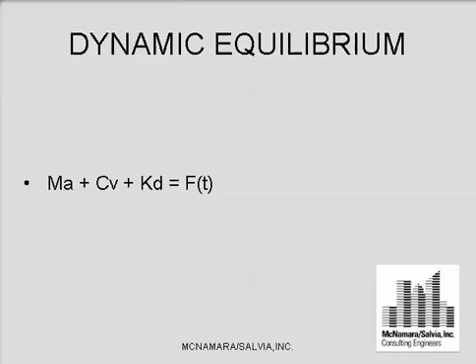So one of my problems in discussing damping is this mixed nomenclature that exists. As I said, standard structural design is stiffness and strength. Every day of the week, as structural engineers, that's what you deal with. It's static forces, usually, and it's displacement related, something you can all relate to, beam deflects, etc.

Conceptually, damping, we really don't know much about it. We don't have a feel for what C is, the term in the equation that's supposedly equivalent to the mass or the K terms. And what it does is it just groups whatever response to K that you find in your actual structure, which is based on dissipating energy.

It groups all of that, whatever it is, joint slippage, material nonlinearity, etc., into one term, damping, and it makes it this mathematically convenient term of a viscous damper, or viscous damping for the mathematics, really. As I said, it doesn't exist in nature.

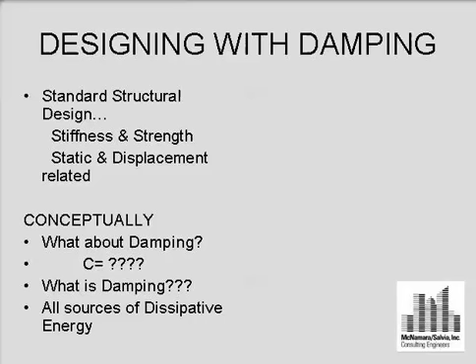We assume values of 0.5 to 2% of inherent damping. This is damping that you find in actual structures. For wind, seismic, as I said, it's a common assumption to have 5% in all of the equations. That's what the response spectrums are reduced to, and again, for no real good reason other than historical.

The damping values that you assume are system dependent. If you have a steel axial force tower, a guyed tower, for example, no concrete, no nothing else on it, just steel, it's very light, might even be 1/4% of critical. You have a moment frame. Everybody says moment frames are great, they're 2%.

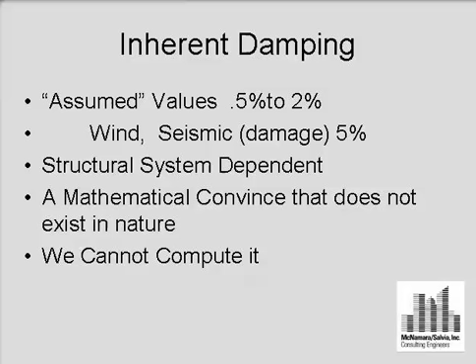We can't compute it. So, since it is such a powerful response-reducing mechanism, the way to approach it, I think, is to design systems that, the same way you design your structural parts, your geometry, your sizes, you design a system to provide you with a specific amount of damping. And that you get the reliability of knowing you will reduce the response based on that calculated and designed amount of damping.

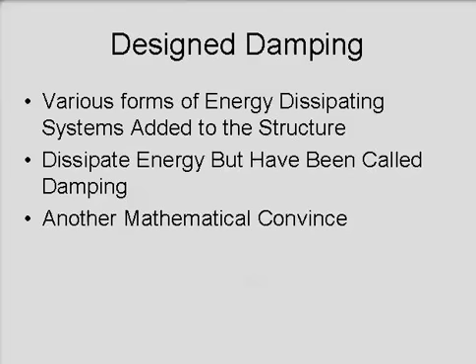Equivalent damping systems come in many different forms, and this is another problem with lumping it into so-called equivalent damping or damping systems. They're dissipative systems, and each one dissipates energy in a different way. Friction dampers obviously do it through friction, but they're displacement-based. They're displacement-related, so when they're dissipating energy, the structure is deforming the same as it is when resisting it through the stiffness matrix terms.

Viscoelastic dampers, which are material-dependent, are also displacement-related. Yielding dampers, where you actually yield parts of materials—several in the audience, I'm sure, have designed some rather esoteric yielding systems—again dissipate energy, and it's displacement dependent.

The viscous dampers are a different breed—shock absorbers. You all have them in your cars. I used to have a car that had very poor shocks, and when I drove it, you really knew you didn't have shocks. Today I don't think there are too many examples of that, but that was a few years back.

But they are velocity dependent, which is really different than what you're used to designing with, because viscous dampers and velocity dependent dampers have their maximum effect when the velocity is maximum. In most tall structures, which is where we apply a lot of these, the velocity is maximum when the displacements are zero. That has a significant effect on the concept of how to design with these things, because when their maximum effect on the structure occurs—the maximum value of the forces in the dampers—the displacements are zero.

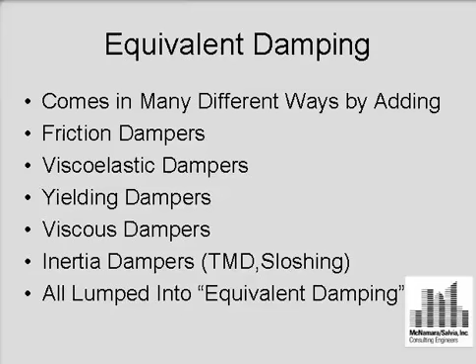Thinking about that, one of the ways I like to think about the dissipating systems—and I have to pause to stop calling them damping systems, because that's the way it has grown in the literature and that's the way people talk about them—but if you look at a building, a simple frame, fitted with dampers as a viscous damping system, shock absorbers for example, you have your static resistance, which is based on displacement. You have the dynamic resistance, which is based on velocity. So you have these two different resistances that you create.

One is created by stiffness, resisting the loads with your structural stiffness. The other is by the motion that happens because of the action on the building, which creates corrective forces, if you will. In viscous dampers, they are velocity dependent. In the tuned mass damper, it's displacement dependent, and it's simply a corrective force at the top of the building where the mass is. But it's a corrective force—it's not a mysterious damping hidden in the equations.

If you start to think about it as corrective forces, then you can start to think about how you arrange those corrective forces to provide the best system to resist whatever you're trying to resist or reduce. That takes away the mystique of the big C value in the equation, because I still don't know what to guess at the C is when I'm doing these numbers. I always back figure from forces I need.

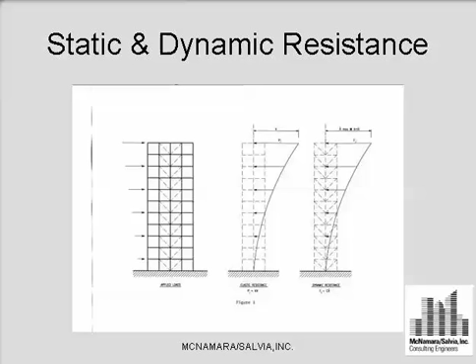But these systems are different. These are definitely designed. So basically, you have to think about them as how they work. Think about what they're doing to your structural system, not as this equivalent damping. Although I might have to return to that in a bit, because the industry has accepted equivalent damping. And if you're going to do any work in the wind tunnel, they want to know what the damping of your building is, because all the numbers they give you are based on your damping. So you're either going to guess, or if you're designing a system, you're going to tell them what it is, and then you'll get your numbers.

Now, as an aside on that, the wind tunnels are doing tremendous business these days in heavy wind areas, because if you have to design these tall buildings for the wind forces that are in the codes, forget it. It's not going to happen.

In South Florida, for example, code forces at the 146-mile-an-hour winds on ocean exposure conditions, exposure C or D, by the code, are horrendous. The wind tunnels are giving us back reductions of 30%, 40% of those numbers. That's significant, but there's a crux to that reduction. What's your damping? Well, a lot of engineers now are saying, oh, it's 3%. Where are you getting 3%? But they're saying that, and it's absolutely wrong.

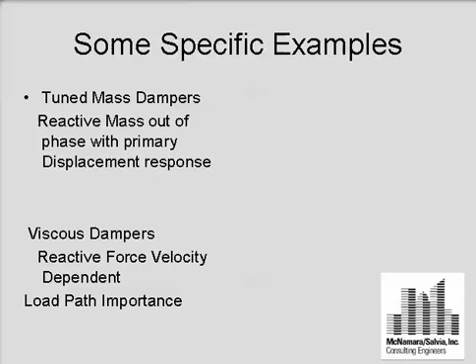But these are the thoughts I have on the whole area of damping design, or what is equivalent damping, and I try to categorize it and cast it into the dissipative systems thoughts and concepts of forces that you create. And that's really what I can leave you with in terms of designing concepts, because that's how they work and that's how you should think of them. And it's important, and the load path is the other important aspect.

So I'll give you a couple examples here of some of the damping designs that we've done. Some of these are a little different from what I just talked about, but I think they're interesting. This one I like especially because it was one of our high-end hospitals with the most sensitive kind of equipment that you can imagine. And if you ask the equipment manufacturers what you have to design for the floor, you know you can't make your floor that stiff. And if you do, your owner can't afford to make your floor that stiff.

So you have to look at different approaches, but this is another area that gets tangled in with what indeed is the damping and what indeed is the measured damping of the floor. This was a little area in Mass General Hospital in Boston. There was an MRI installation. They were having worries about footfall vibrations like most hospitals do worry about. We designed it for nothing special, the usual hospital live loads. We don't design any of our office or laboratory floors for these very stringent vibration criteria because you can't really meet them with economical designs, and we find that you don't need them.

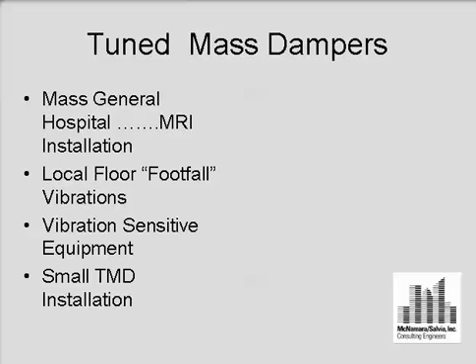We've done literally millions of square feet of this stuff, and if you have a problem, you might solve it this way. This whole area is a cantilever, that gray area. I think there's a column back here and a column over here somewhere. And this area was the corridor, and the MRI was down in here. And they were having some vibration problems.

So we suggested putting in, it couldn't get too much worse. This is where the ambulances come in. So you have vibrations coming up also, not just coming from the footfall. But I like the solution because the solution just is very high-tech and then very low-tech.

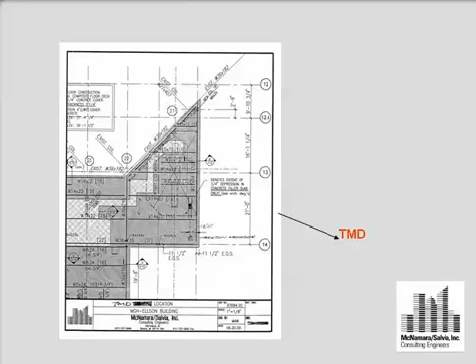The tuned mass damper was placed right near where the corridor turned and where they actually measured the floor, where we were seeing the response being maximum when footfall was applied at that location. So we put a tuned mass damper in, which is not always the best solution for footfall, but the damper was made up between the two beams.

That's a section there. I found a piece of metal deck on the job site, and that's the spring in the damper. It happened to be the right section modulus, moment of inertia. Actually, they put it in upside down first, and then we realized that they had it in upside down. So we had this bottom piece, which is a piece of metal deck, and that's your spring in your tuned mass damper, if you will.

The mass right here was plumber's lead, and we added plumber's lead until we got the right mass we wanted on the mass damper. And then we taped it up with duct tape.

And then we had a Senatech come in and design the viscoelastic damper to give the tuned mass damper its secondary damping, if you will. If you look into the tuned mass damper design, there's the system design, then there's the tuned mass damper secondary damping to keep it out of phase with the main building or main system. That second part was the very esoteric, high-tech design by Senatech, to come up with a wire that was in some kind of goo that gave us the damping in the second system.

It worked like a charm. And here it was, pieces of nothing that just were the right properties, killed the damping, killed the footfall vibration with that damper system.

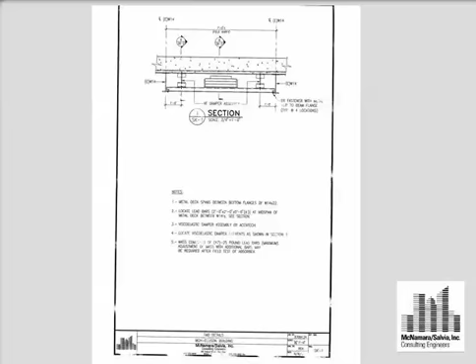But we did measure the response after we put it in, and tuned mass dampers, if you design them properly, can reduce your response by about 30 to 40%, the dynamic part. So that's it, and that's what it was. It was, I forget how many pieces of lead, and then duct tape to hold it all together in a plywood box. So that was one high-tech damping solution.

And then they refused to pay us for it, so that was a different issue.

But this is one I did last year. Another type of damping or dissipating energy problem where there was a design being done in San Diego.

A church, called a rock church in San Diego. I don't know too much about it other than I was brought in as a consultant for the design of the tuned mass damper. Before it was built, the congregation and building committee were concerned about the possibility of the auditorium vibrating, because basically it's a rock church.

They really get heavy music and loud and bouncing around, and it was all these cantilevered balconies that the congregation would be on. So they asked us to damp it, or they said they don't want to have annoying vibrations.

Well, what is the input? I don't know. What's acceptable when you're bouncing on the balcony singing rock songs? I don't know, that's not in any code that I know of. So I created a forcing function that I thought might be what a rock church would do, and we knew we had to put in a tuned mass damper.

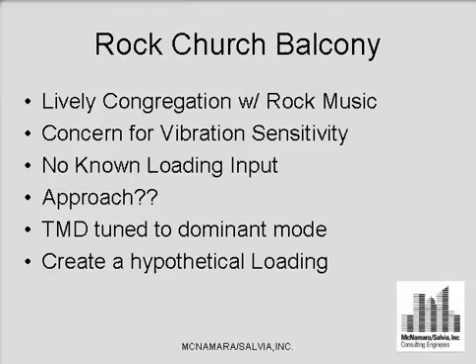So how much would it bounce? I have no idea. But I put a person on every one of those nodes, and then I made them bounce up and down, sort of like if it was a rock song. And then I said, maybe we'll accept half of that as a number. And it seems to work.

Taylor Devices did the whole design for the two tuned mass dampers. It looks now, though, I just found out this morning, that we thought the two would be fine because most of the action would be in the center. It seems like the side balconies, where we didn't put the dampers—because we did have a design for 4 of them, but of course I didn't want to go for the full expenditure at once.

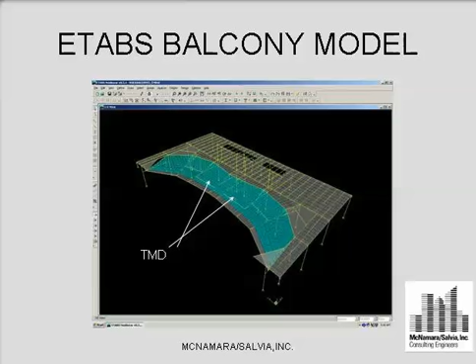It looks like the side balconies is where all the real action is, and that's bouncing a little bit too much, so we may have to put 2 more in there. But it seems to be acceptable, whatever that is - the congregation says it's okay. So that's another off-the-side application of a tuned mass damper.

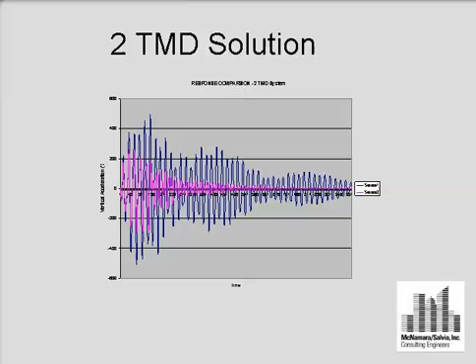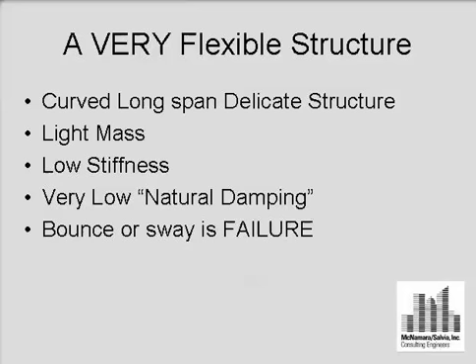This is another tune mass damper type application - a very flexible structure, light mass, low stiffness, very low natural damping, and any bounce here is failure, because this is one of these pedestrian bridges, and if they bounce, people won't go on them. You have to close them, the lawyers take over, and that's considered failure. But they're very light, with virtually no cladding, and they seem to all have similar spans - 60, 80, 90, 100 feet is what you end up doing.

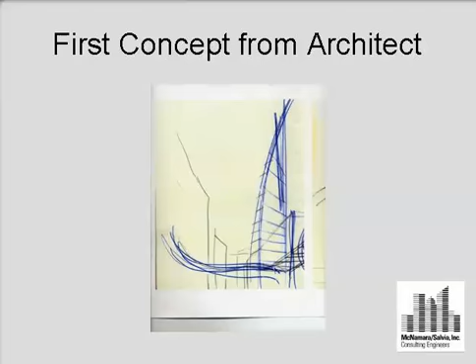They all seem to end up - well, this is the sketch we got. This is sort of what Howard Elkus wanted. He said, see what you can do. I'm sure you've seen other cases where you don't have too much information to work with, so I sent it back and said, I need to at least know something, Howard, help me. So he sent me back with that - he gave me the height. And then we just went ahead and created a model

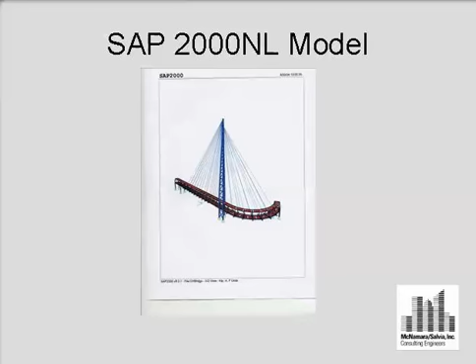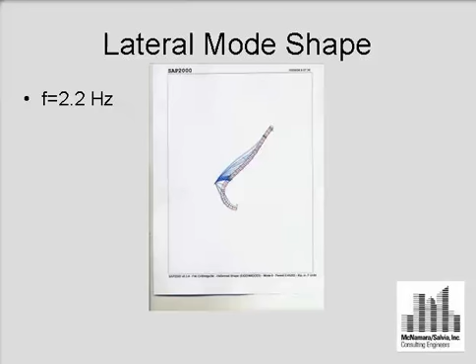of what I thought it might be, and did the dynamics on it. And of course it falls right where you don't want the frequencies. 2 hertz is just not a place to be, either in floors or in bridges or anything, and that's where it ended up. So that's out for funding now, so I don't know if it'll ever be built, but it'll have 2 tune mass dampers, 1 vertical and 1 horizontal, to take care of those frequencies. That's just another example of the TMD issues, which I seem to get stuck on because of my original designs in the 70s with Citicorp - but these are small versions.

Another example now of the force, which is a good example of what I was talking about in terms of the forces and the way they can be thought of in space. This building is a tower in Boston we did - right at the Prudential Center area. It was designed in the late 80s, then nothing was done for 10 years, and then we came back and redid it.

It had a normal 40-story wind system that you would do anywhere - nothing special, sort of a square building, outside tube on the perimeter. You can't get much better than that for overturning. It gets transferred to the core at the lower levels, as usual, where you can't have closely spaced columns. Nothing extraordinary about the building - designed to liberal but conservative standards, I would say.

We tested it in the wind tunnel, and the projected motions for the building came back significantly higher than we would accept. It was basically because of the 52-story Prudential Tower next to it - the wind in its predominant direction was peeling off of that tower, and the vortexes were 4.5 to 5 seconds. The period of the building was 5 seconds. So the wind tunnel went nuts with the resonance, and we had to come up with a system that would calm that down.

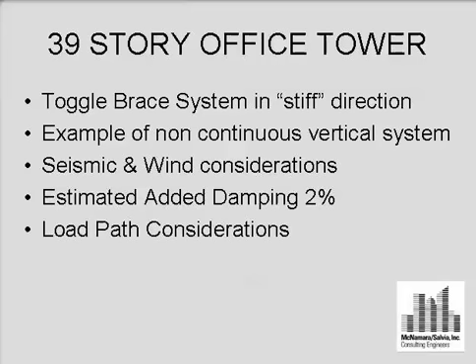And basically that's the tower - people call it R2D2 in Boston, but it's a Boston Properties project, all office. This is a vertical organization of the damper system we came up with, and you can see it's every other floor, simply because we didn't need it every floor. That's part of that issue - the force that any one of those little dampers generates goes to the perimeter moment system, the load path, so you don't need them on every floor.

It's not like a brace - it's not like it's carrying a shear. It doesn't need to. It reacts by pushing and giving a shear, giving a load in the opposite direction to the way the building is going.

So it's a different issue. Conceptually, you come up with something that doesn't necessarily look like your usual structure. The structure has holes in it, and in this one, it has what we call a toggle brace. You see that odd-shaped brace, looks like a lambda.

That toggle is because the building is stiffer in one direction than in the other, and the toggle amplifies the motion. We're trying to suppress motion, wind response at low response levels, which is a problem because we think we can predict them reasonably well at high response levels. The prediction estimates at lower response levels have an even bigger spread on them.

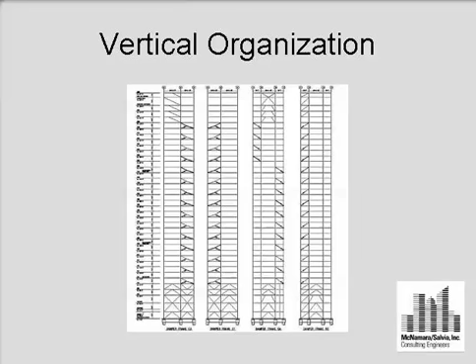In the other direction, the building was more flexible, and we could take advantage of that and didn't have to amplify it. So that's the vertical distribution. That's a look at what they look like locally. Taylor has patented that toggle system. It has a lot of very subtle features to it, especially the out-of-plane capacities, and they work quite well.

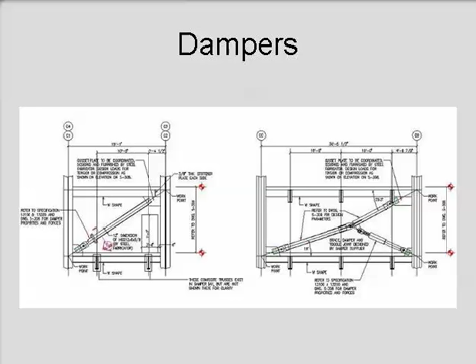No complaints. That's what we know about the building. No measurements since it's been installed, but then again, we've had a lot of good storms, a lot of storms with the northwest winds, which is what we're designing for, and no complaints.

So that's a solution that was done where we started to distribute these things spatially, and you can see in the plan, there's not what you might think of as a symmetrical organization either. You can do what you want in the plan. Again, it's throwing forces back to your structural system to correct the motion it's going through, and that's sort of the nice thing about it. You can play with that.

I've seen a couple of papers now from Southern Cal professors that have used them strictly to take care of torsion problems, torsional motion problems. So you orient them just for the torsion, don't worry about just the translation. It's a different way of thinking from our usual presentation of these systems, and it really gives you a lot of freedom.

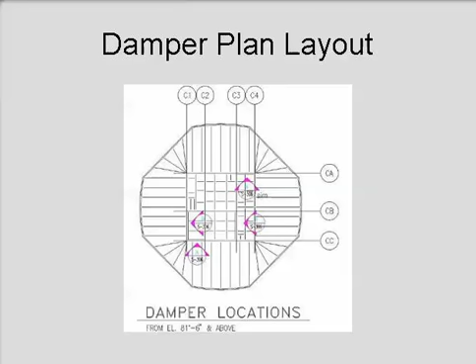I think I've worked on them for seismic damage control, and I think the appropriate approach is simply to put them in the bottom floor. Not so much like an isolated building, but a seismic damped building, which I'll show you next.

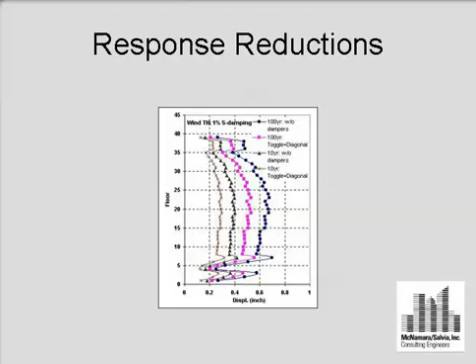This is in the paper that's in the CD, I think, and you can see there's good reduction. That's basically what's there for the different directions. This was a case for seismic damage control, again using viscous dampers.

New airport terminal in Boise, Idaho. The old classification was 2B, I think, so it's a moderate seismic zone. But it's one of your terminal type buildings, so you have large glass walls. Taylor convinced the architects and engineers, before I got involved, to consider a damage control system, and then we got in and did that.

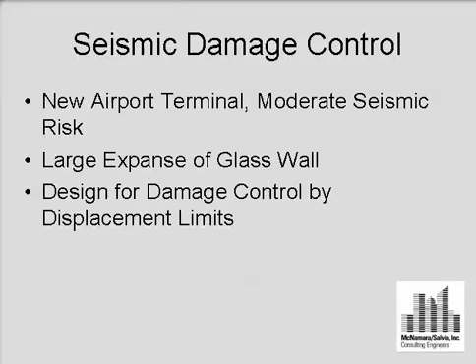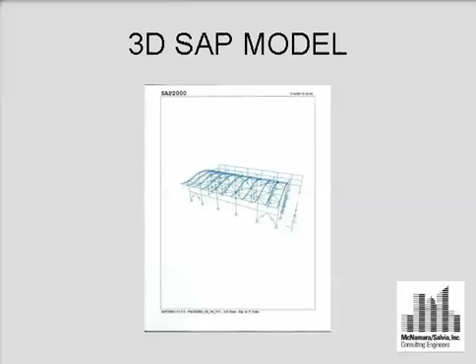Basically, we did a 3D model, and we put dampers in that wall. The frames are a little misleading there—those are 52-foot spans, so they're very flexible moment frames in the glass wall along the plane, and then we had braced frames perpendicular to that wall up to the roof, designed locally for the spanning from the roof to the ground.

You'll find that in some of these cases, the shear generated by these dampers going back to the structural system can be bigger than the shear originally created by the time history without the dampers. It's an interesting aspect of how they work. This is why you can put them on the bottom level and it damps out or forces out the response. This approach cut the expected displacement response in that direction by about 50% with those dampers.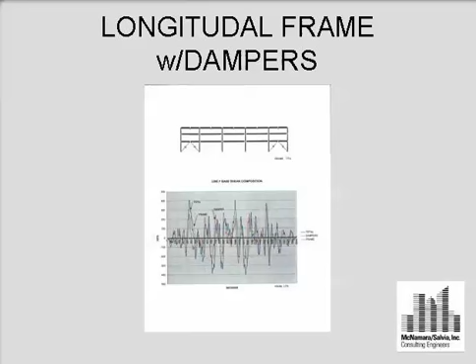Major airport terminal, the whole package cost about $100,000, and they bought all that protective system with that. Not only did they buy it in this direction, they bought it in the other direction too, reducing response by about 30%. The authority really just wanted a political solution more than a structural one, but it turned out to be a fairly good structural solution. I was surprised by the end results. If you were doing this in California, you'd have a much higher design intensity level for base motion, but also a lot more things to look at.

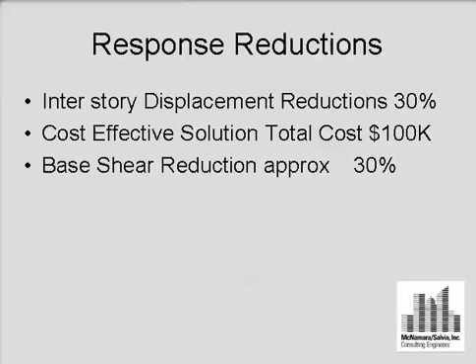There's some plots of the before and after. You can see you get similar response, but the peaks are all reduced by 30% or so.

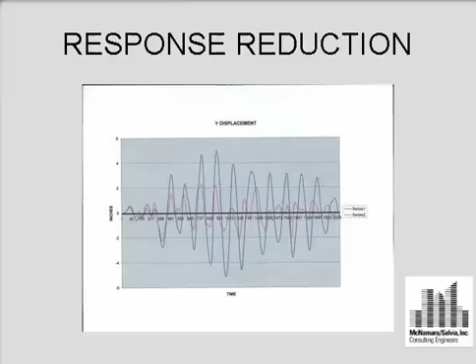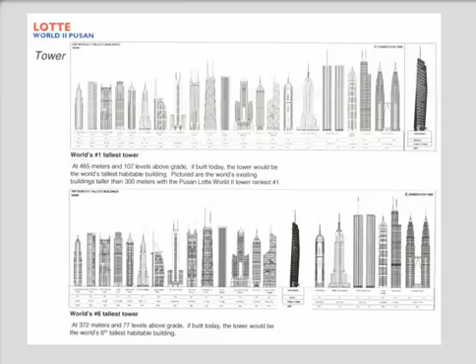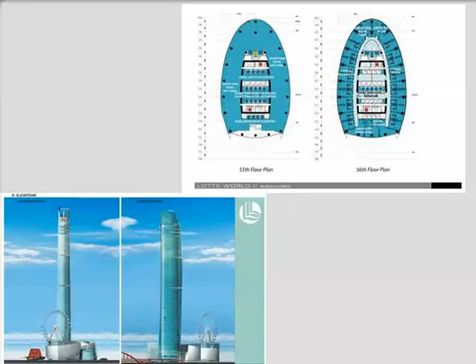This is really not part of this talk, but I forgot to take it out. This was one we were looking at in one of these design competitions, racing for the tallest, 107 stories. It will have a tuned mass damper on top, no doubt, if it's ever built. They do these design competitions wanting the tallest in the world, then somebody else beats them, and they have to do another design competition. But this was 107 stories. I also like this solution.

This is what you're given when you go to the Hyatt in San Francisco on Union Square. They hand you this card, and they'll give you earplugs if you want. This is an alternate to damping solutions. That building is 40 stories, a steel frame, and it sounds just like a boat. It creaks and moans at 5 seconds in one direction and 4.8 in the other. I sit there and measure it when I stay there. That's how you can solve it without spending any money.

So that covers my talk on damping systems, and if I leave you with anything, it's remember that load path. Thank you.

Any questions? The question is what testing is done to correlate the analysis. To date, none, though there has been testing in universities. For example, the toggle brace system was tested in a usual plane frame situation, maybe a 5-story frame or something like that. The dampers are very reliable in themselves, I don't think there's any worry about that. The issue of putting them into buildings is the real important issue, because a test in a 2-bay plane frame isn't going to uncover the load path issues. The dampers themselves get tested to a spec for the job, but there aren't any full-scale tests, any more than there are good measurements of existing damping, and it's all based on that same kind of projection.